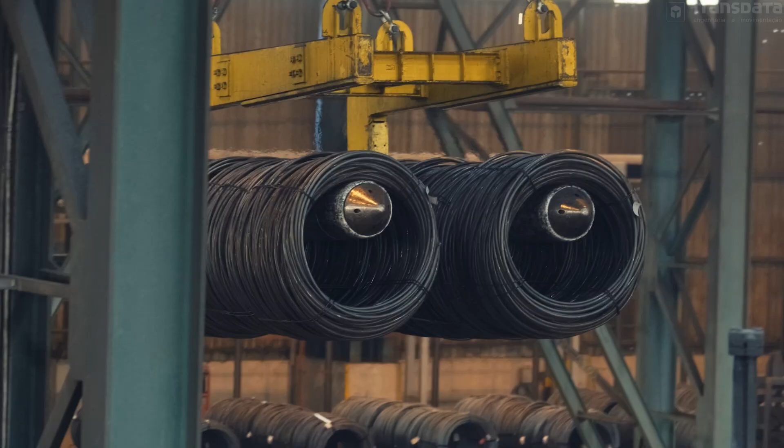With its vast territory of over 8.5 million square kilometers and a population of more than 210 million people, Brazil stands out as the largest economy in South America and a key player on the global stage. Its abundance of natural resources and industrial diversity positions it as a leader in multiple sectors, with a strong emphasis on the steel industry. Gerdau is a Brazilian multinational enterprise in the steel sector, and one of the world's largest steel producers, operating in multiple countries. In 2024, the company recorded a net revenue of $12.0 billion.

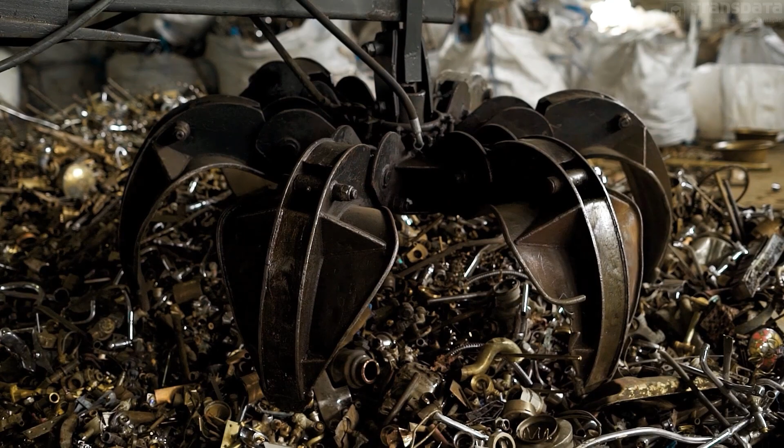Its Ouro Branco, Minas Gerais plant is one of the most advanced facilities in its portfolio, significantly contributing to the economy and society. It generates thousands of direct and indirect jobs and fosters regional development through infrastructure investments, professional training, and socio-environmental projects. The plant also stands out for adopting sustainable technologies such as scrap recycling and reduction of CO2 emissions, reinforcing Gerdau's commitment to sustainability and innovation in the steel industry.

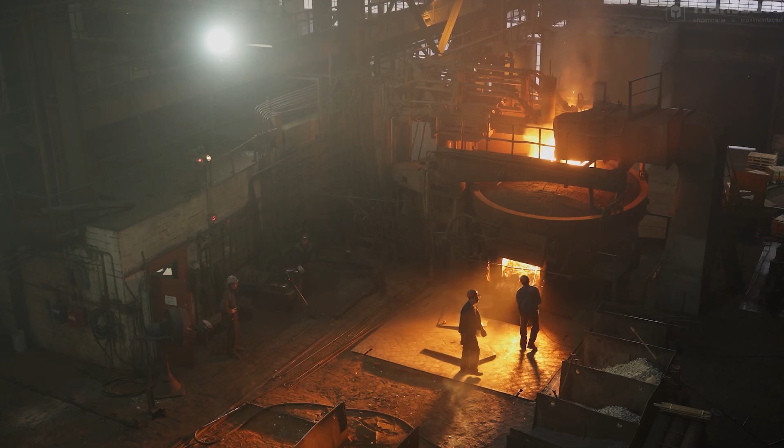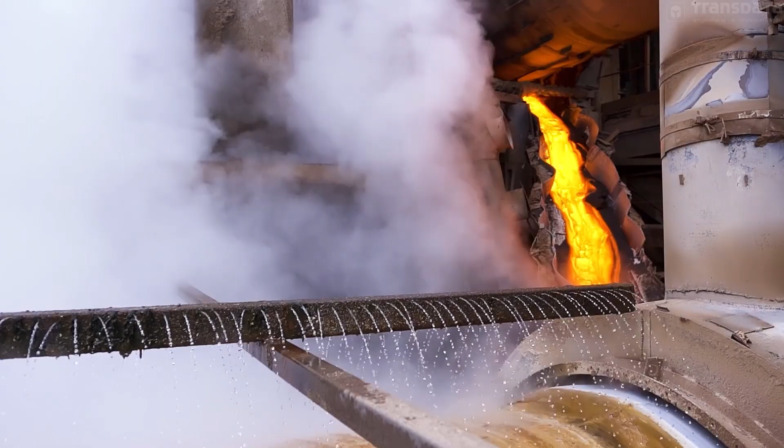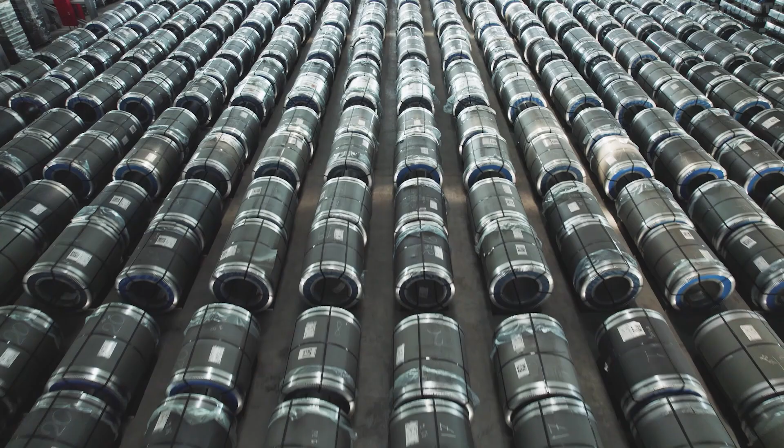Now, this project was not just about installation, though. It was about minimizing disruption in one of Gerdau's most advanced plants, where every hour of downtime translates into millions of dollars lost. The new rolling mills were installed within the operational steel production line, and our strategy was designed to minimize downtime, resulting in financial savings of approximately $96.5 million.

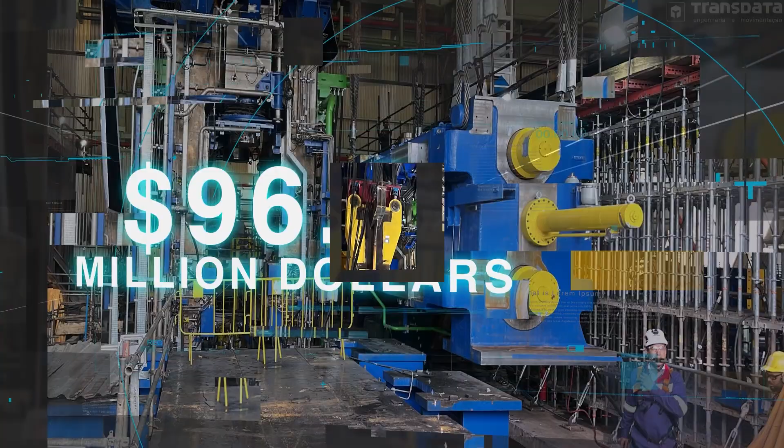It also became a milestone for Transdata, marking the largest movement ever performed with a 4-tower hydraulic gantry system in Latin America. Throughout the process, we provided our client with customized handling solutions during the assembly and installation of all main rolling mills components. The project began with the acceptance of the bold engineering outline concepts of these solutions.

Our team was committed to finding innovative yet safe approaches, combining various types of equipment for heavy load handling. Gradually, all efforts converged to develop the most suitable solutions to meet all operational and safety criteria required by our client. This effort marked a major milestone for Transdata's engineering team, requiring the highest number of man-hours ever invested in a single project.

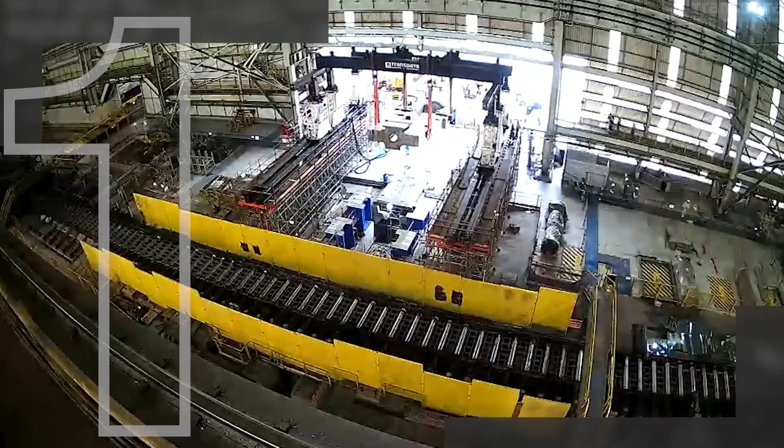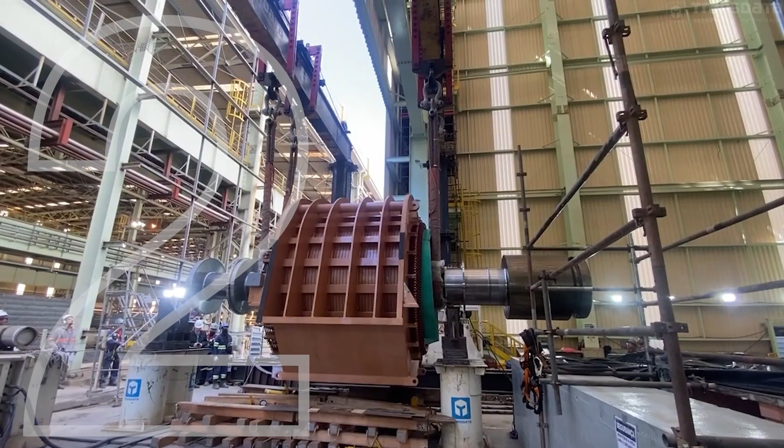The project was divided into 3 major phases. 1: Transport, lifting, verticalization, and positioning of the rougher mill housings onto a temporary pre-assembling base. 2: Transport, unloading, rotor-stator coupling, and positioning of fully assembled mill main motors onto their civil bases. 3: Lifting and final positioning of the rougher mill pre-assembly, the edger mill housing, and the edger mill gearbox support frame.

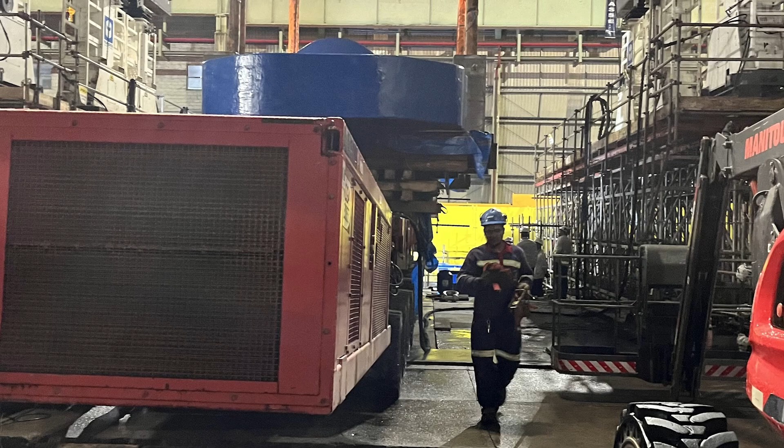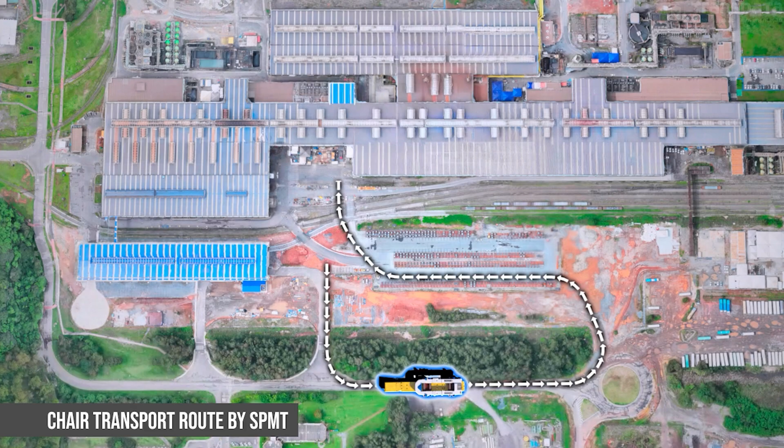Phase 1. Our first operational challenge focused on standing up and positioning 2 rougher mill housings, each weighing 515,000 pounds, within a highly congested industrial area. Without halting the ongoing production, the internal transport rolled over meticulously planned and studied routes.

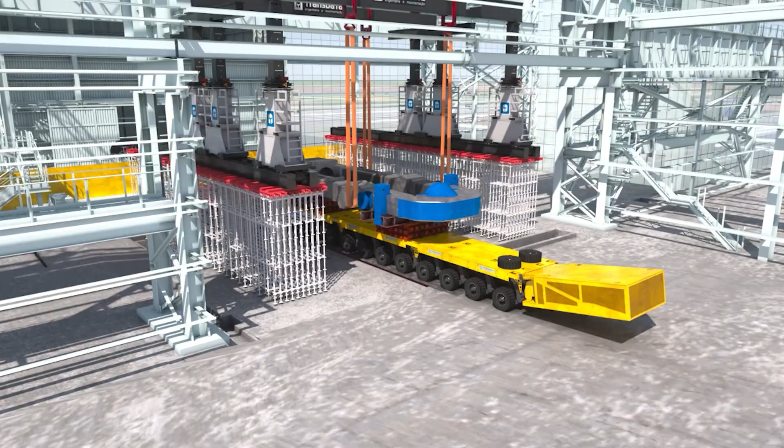One of the major challenges was maneuvering and positioning the components within an already operational production area without disrupting manufacturing activities, and coordinating alongside the continuous movements of rail cars carrying materials over its numerous track crossings along the route. High maneuverability, precision-controlled, self-propelled modular transporters, SPMTs, were successfully applied.

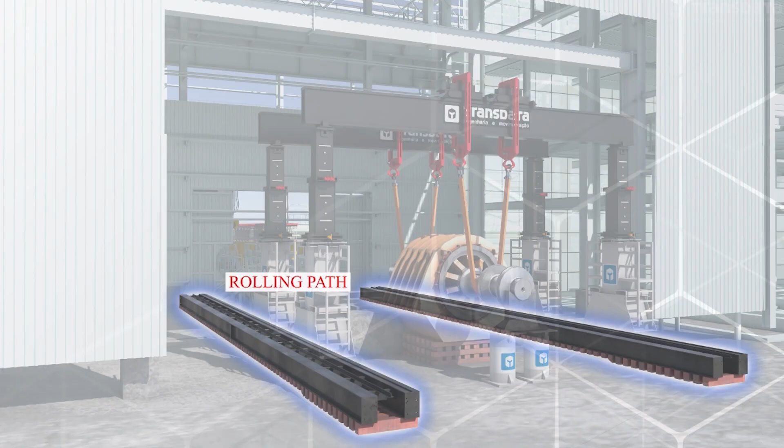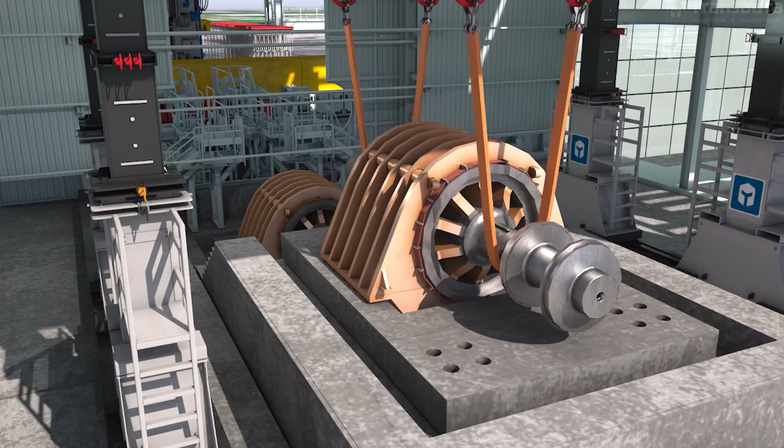Phase 2. Rotor-stator coupling and mill main motors positioning. Key challenges included working within an extremely confined space with a 13.5-foot wide access path, managing the less than 1/4 inch clearance between rotor and stator during coupling, and mitigating the heavy lift operation's load pressures on the existing concrete slab. Our remote-controlled SPMT and 500-ton capacity 4-tower hydraulic gantry, with the modular slab shoring system, provided the successful combination that ensured the required precision, safe weight distribution, and control.

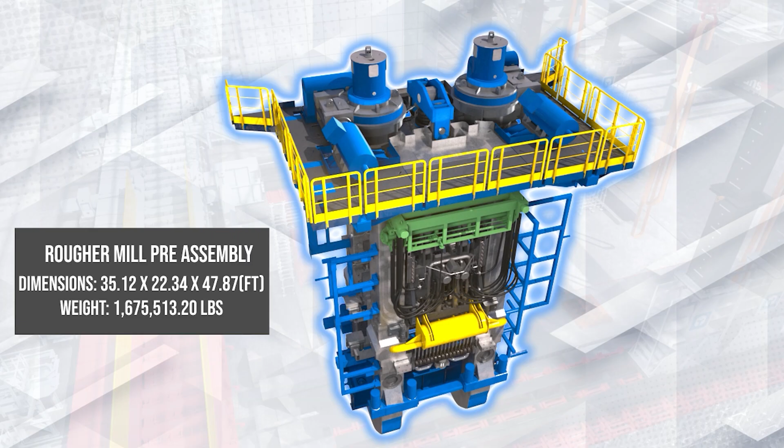Phase 3. Installation of the rougher mill pre-assembly, edger housing, and edger gearbox support frame. The rougher mill pre-assembly, the largest and heaviest component of this project, weighed over 1,675,500 pounds. The edger mill housing weighed 750,000 pounds, and the edger gearbox support frame weighed 551,000 pounds.

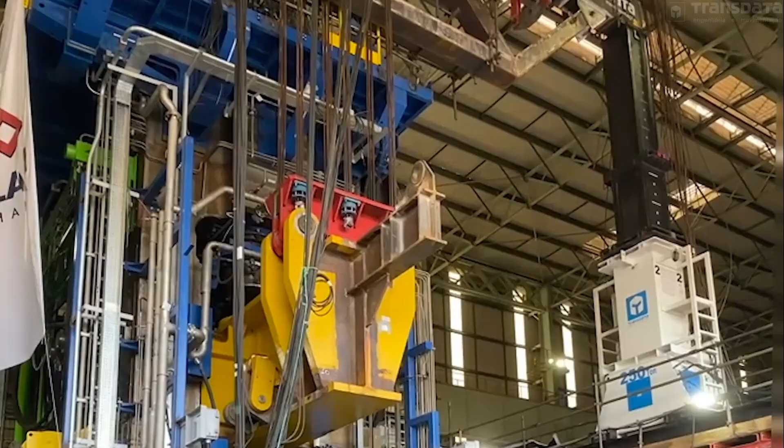To execute these heavy and complex moves, our engineering team designed a combination of gantry towers, strand jacks, and optimized support structures to ensure time-saving, controlled, precise, and safe movements. This included a custom lifting beam developed in partnership with Primetals to handle loads evenly and prevent unintended structural stresses on the fully assembled mill.

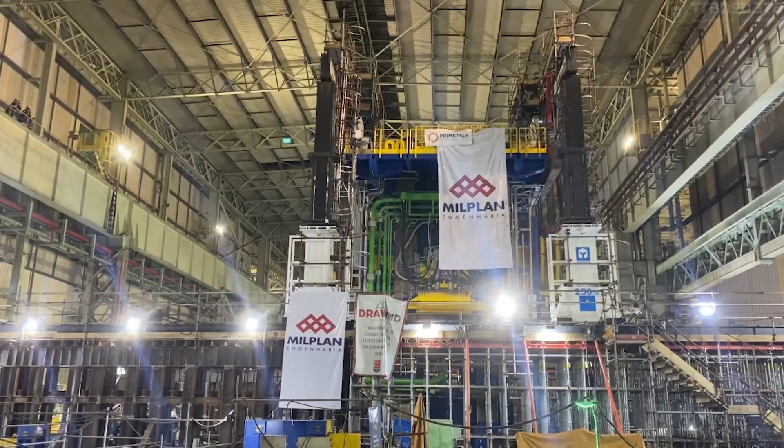A high-set center of gravity, geometric limitations, and the need to avoid unnecessary building dismantling required overcoming very narrow tolerances. Then it was lifted and set onto its working position over its housing.

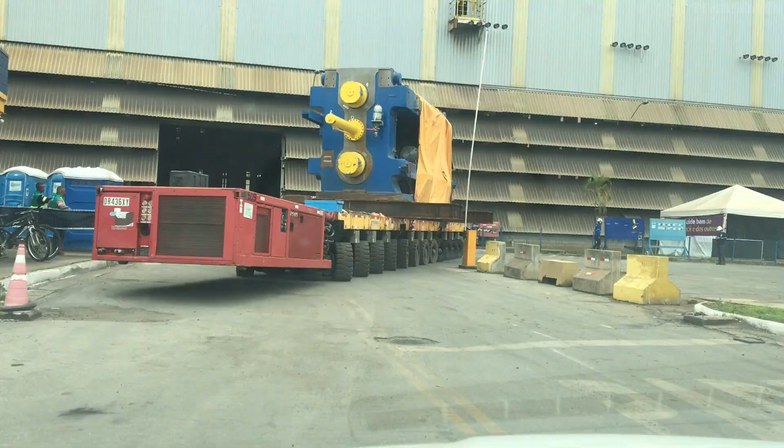The assembly of the edger gearbox was carried out in 2 distinct steps, ensuring maximum precision and safety throughout the process. In the first step, the base of the equipment was carefully transported and lifted using a gantry system, employing a specialized methodology to support its weight and ensure stability during the movement.

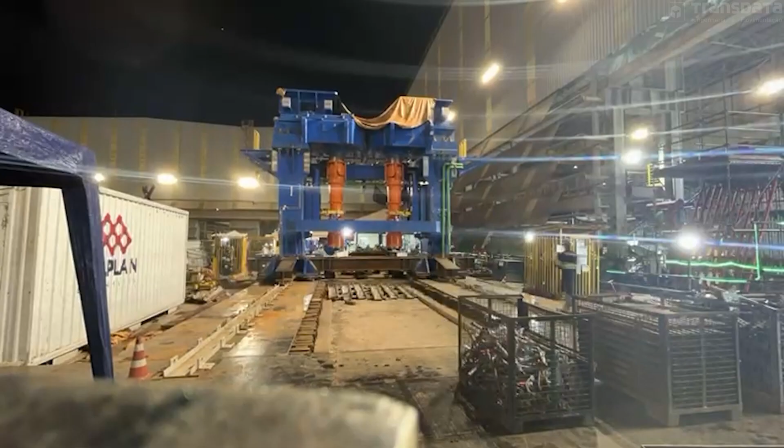In the second step, the assembly of the edger gearbox was executed using an innovative skid system, which allowed the unit to be moved to the exact lifting point. This process ensured that the equipment was positioned precisely, guaranteeing perfect integration at the final assembly location.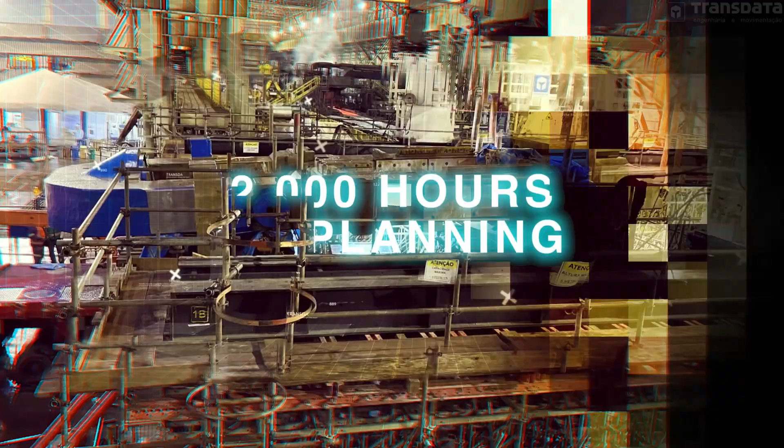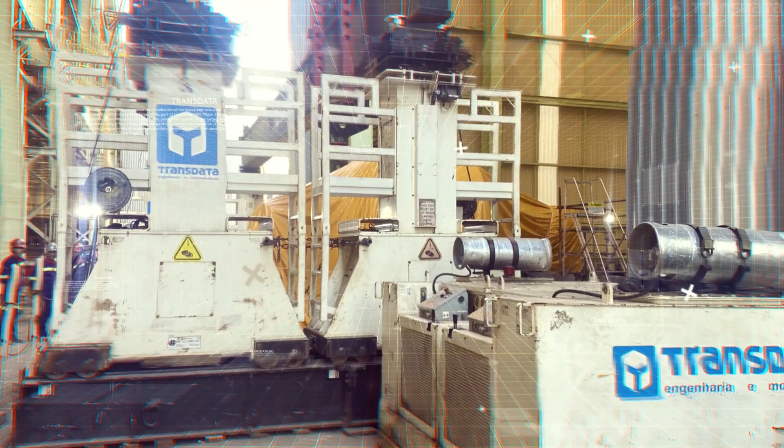2,000 hours of planning, 2,920 hours of execution. Total investment: 4,920 hours. Transdata successfully completed the installation of the heavy and oversized components of the rougher and edger mills, part of the Steckel Mill Phase 2 project for Gerdau Açominas in Ouro Branco.

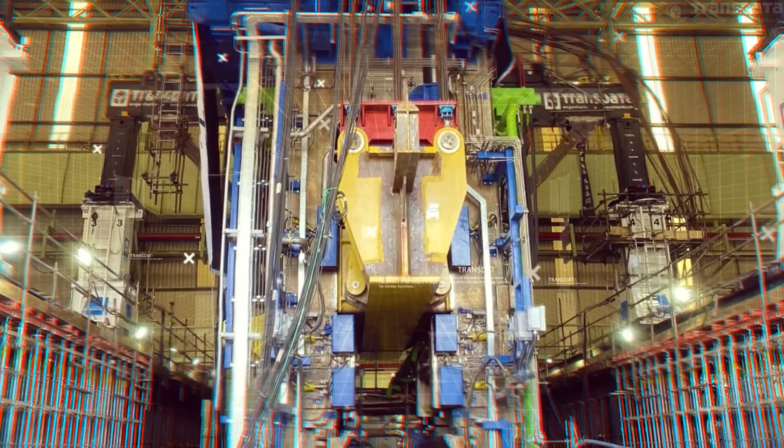This project set records as the largest load movement using a 4-tower hydraulic gantry system in Latin America. It resulted in a 33% increase in hot strip steel production, minimized production downtime, and delivered a financial impact exceeding hundreds of millions of dollars.

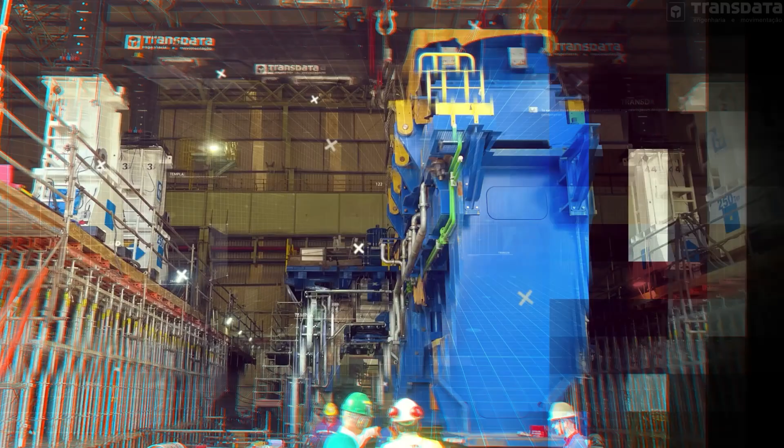The success was driven by our safe and experienced operational force and our engineering team's expertise, meticulous planning, and commitment to safety, precision, and innovation. Transdata welcomes challenges that require engineered solutions that respond to specific clients' needs. Maneuvering large and heavy items within productive industrial realms has resulted in numerous outstanding interventions. Bring your project needs to Transdata.